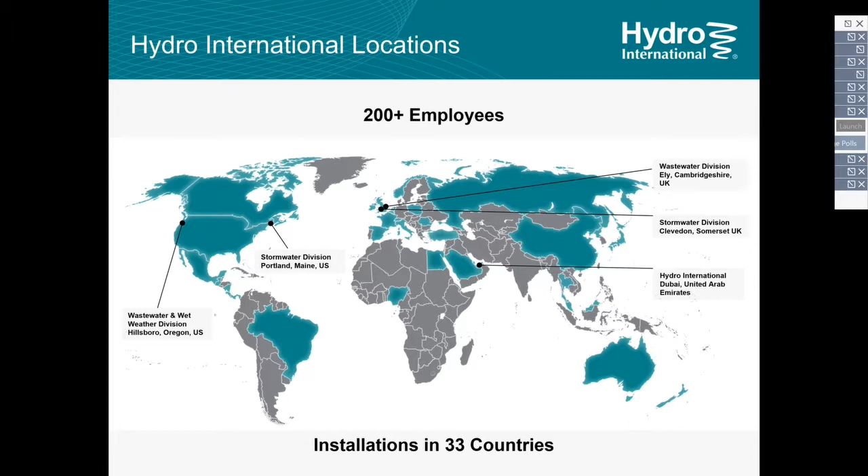Hydro's been around for over 40 years, and we have been in the water quality, water quantity space throughout this period. We pride ourselves in our origins coming from product development, research and development, so you would find that the products and services we provide are world-class, industry leading. Our separators and filters are all over the world, with lots of installations in the US, in Canada, but also in places like New Zealand and Europe.

One of the things we like to talk about is our best-in-class hydraulic laboratory housed here in our Portland facility, where with a 25,000-gallon tank, we're able to really hone in on our testing and ensure that the products we are supplying are really fit for purpose. We augment this with some computational fluid dynamics so that we can do rapid prototyping and engineer our products to be fit for purpose.

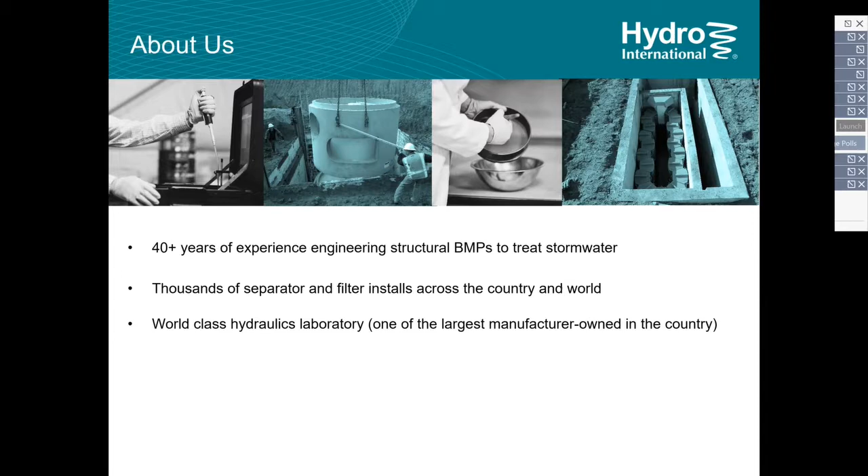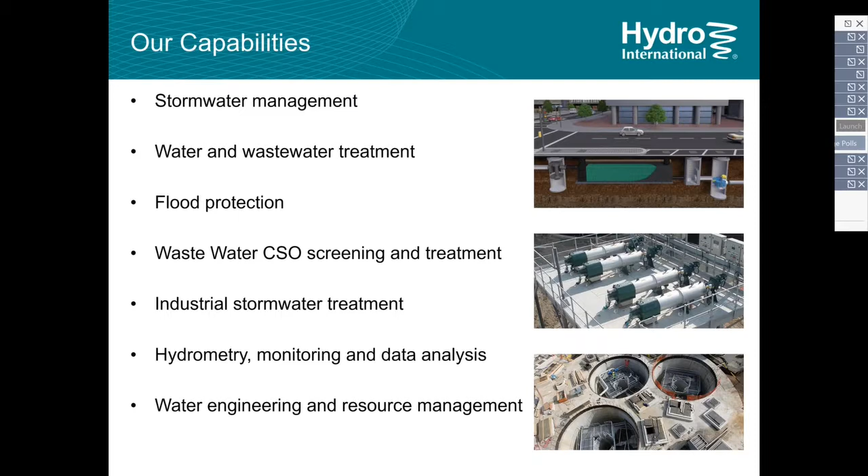Product development and R&D is at the heart of what we do, and one way we do that is by collaborating with research institutions, especially universities around the world. In the US, we've partnered with universities like the University of New Hampshire for verification work. We'll talk about the Up-Flo filter, which actually started development at the University of Alabama with Professor Bob Pitt, and we got involved. So we've used research institutions for product development.

At places like the University of Florida, over the last two years we've done monitoring that has helped with our regulatory approvals. We've also worked with universities in the United Kingdom and other parts of Europe, finding professors doing leading research and technological breakthroughs we can capitalize on, as well as getting product verification and certification to meet regulatory needs.

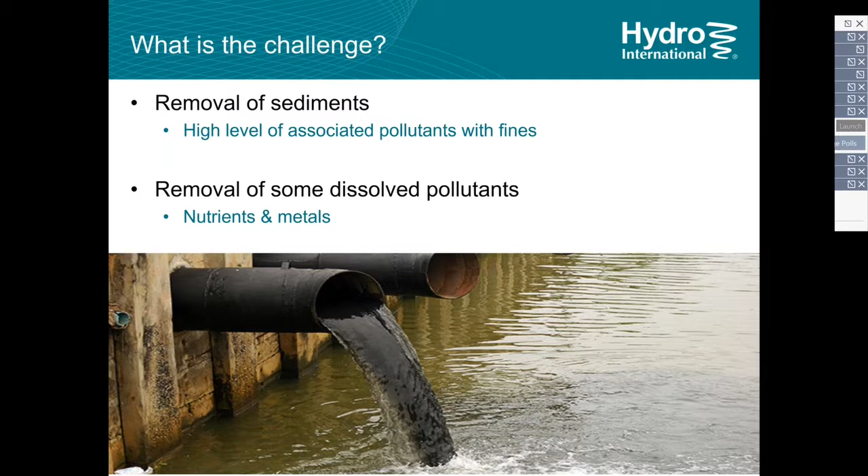That created an industry, because stormwater runoff carries a lot of sediment with high levels of associated pollutants that need to be removed, since their impact on our water courses is significantly negative. Over time, dissolved pollutants have also been added to the mix, some from agricultural runoff but also from stormwater management in our urban areas. So coming up with ways to take nutrients and metals out before they run into our water bodies is also quite critical.

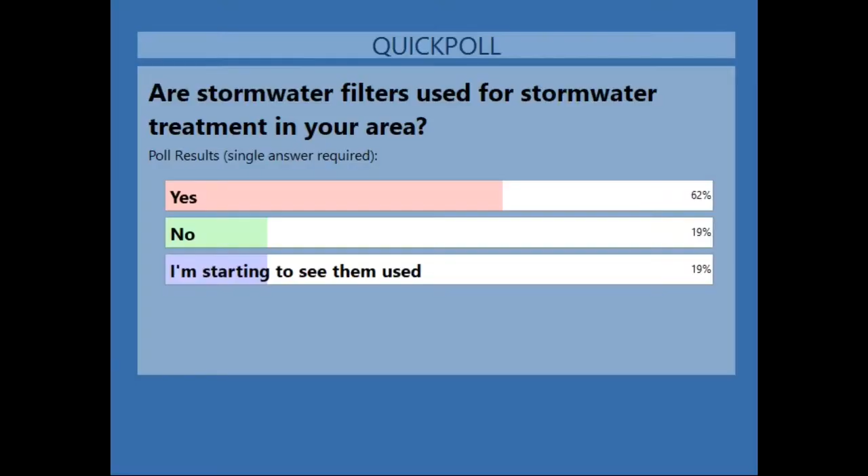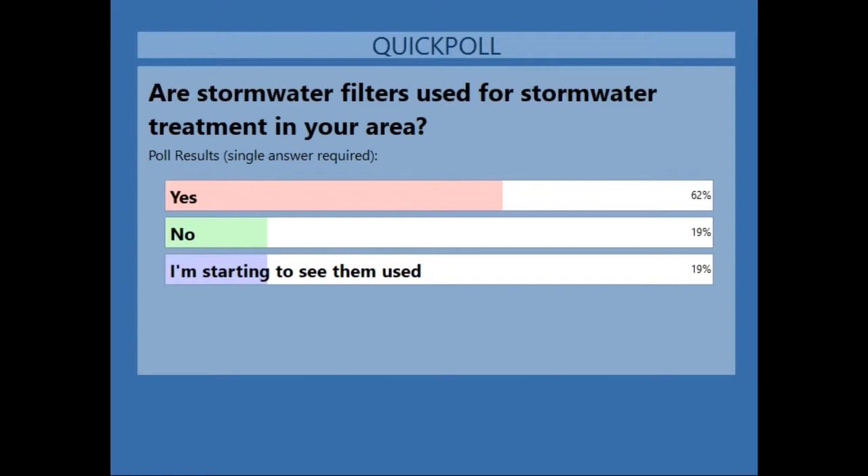I presume you're seeing the results from the poll now. On this webinar, about 60% of us are using filters as a practice for stormwater management, so hopefully as we go through, we'll get a few insights to help with that. There's also 20% starting to see them being used, so we might get some useful things here. Thanks for your participation.

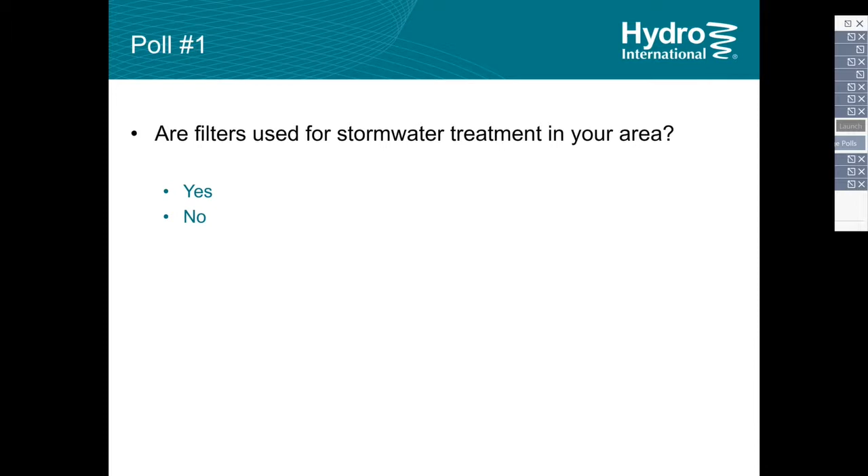So what are the things that we target in stormwater treatment? When we looked at the Maryland report, we found that sediment is a major contributor of the pollutants generated from stormwater runoff in general. And this has given us a sense of the particle size distribution of these pollutants, so we start from gross solids all the way through to dissolved solids.

Now, treatment goals determine what sort of system we need to get the level of treatment that we're looking for. So if you go to some places, gross solids is what they care about. So if you're looking to take out material that's more than 1,000 micron or so, a screen is probably appropriate to meet those regulatory requirements.

When you're looking at coarse solids and some fine solids, the higher end of fine solids, hydrodynamic separators, vortex separators are useful. And then when you get into really fine solids, then you have things like filtration and other chemical processes being useful mechanisms. So this gives a broad spectrum based on regulatory needs.

And in some jurisdictions, taking out 100 micron is adequate, so a separator would be useful, and there are a range of separators that address that. But today we want to focus on those finer particulates where filtration gives us some advantages over just regular settling.

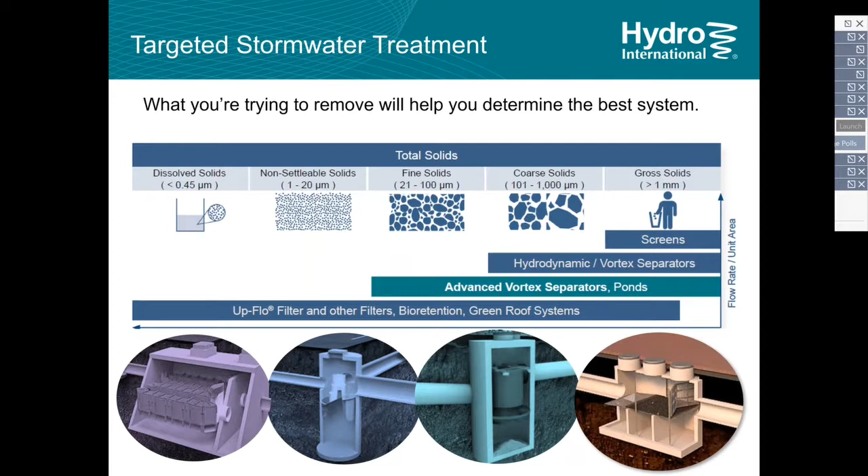To talk a little bit about the filtration process, there are really three key mechanisms by which we're able to take particulates, metals, or nutrients out using the filtration process. The most widely used is mechanical separation or physical separation, as some might call it.

And here we're looking at sedimentation, just regular settling, enabling us to take out those pollutants. But you also have straining, where as some of the pollutants start to bed in, they're able to take other pollutants or sediments that are coming in to settle with it.

And then you have adsorptive processes where pollutants attract other sediment that's coming in, and they fill the pore spaces that are coming in there. So this is really purely mechanical, and you're doing a lot of straining in here.

We also have chemical filtration, where you are exchanging different ions, more applicable when we are looking at metals removal, copper, lead, zinc, and the like. And you can take out the lead and the zinc by exchanging them out for what you have in your media. And typically you have a little bit of contact time associated with this type of filtration to enable the chemical processes to take place.

We also have biological processes at play, very common when we're talking about water treatment and wastewater treatment. We're seeing it come into play in stormwater management as well, where the plants are giving you some nutrient uptake. So rather than having them go into the water courses, the plants feed on them.

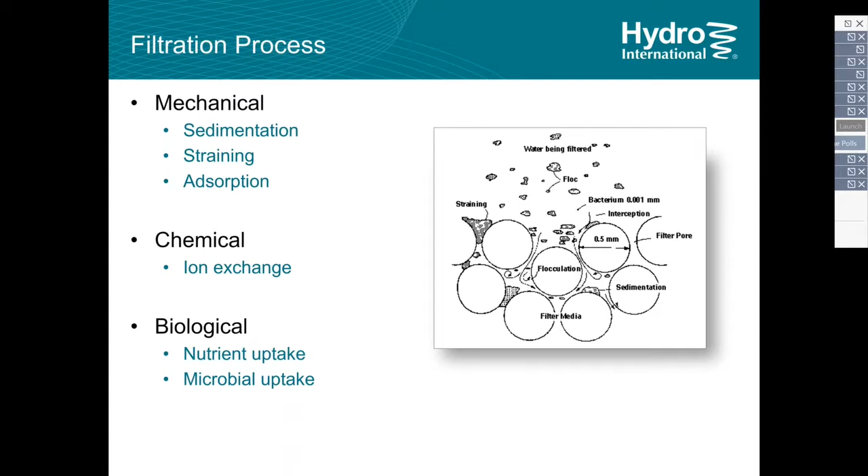But also you have microbial uptake, where the bacteria within the media matrix are eating up the nutrients and the metals such that they don't end up as pollutants. So we are recycling them into the food chain.

What are the constraints and considerations we want to think through when we are looking at filtration? A key component here is head loss. As the charts to our right demonstrate, as you put in more flow through, you're driving up your head. And that's something you have to consider in your drainage network. How much head do you have in there? And would it be able to drive the flow that's required to meet regulatory requirements?

And then surface area, very important when we talk about filtration. Really, that's how we even write out our equations. The more surface area we have, the higher the filtration rates, but also enables us to have more capacity to trap pollutants that are coming through.

And once we get into dissolved components and taking those out, where we're talking about nutrients and metals, contact time becomes one area of concern as well, because we want to ensure we have enough contact time within the filtration matrix so that the pollutant of concern can be taken out. So as we go through, I'll make reference to these three, to some of the filtration products or processes that exist that we can use.

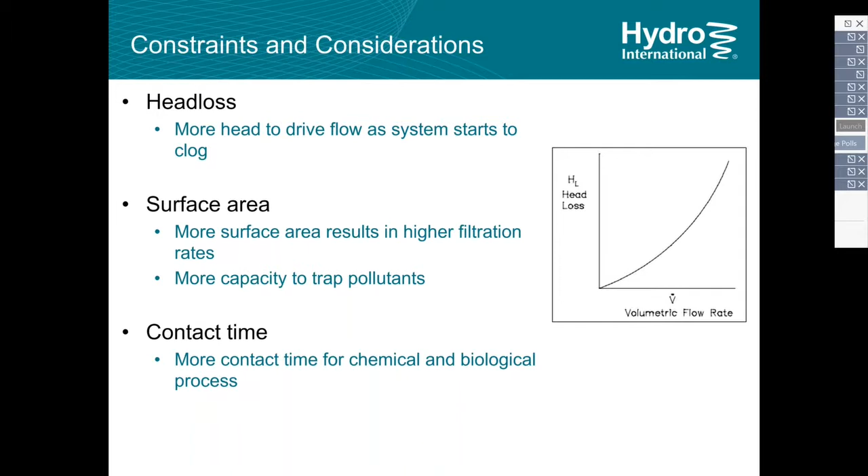So what are some of the filtration options that are available to us for stormwater management?

Here we're looking at media filtration, and it's by far the most widely used form of filtration. I'm sure quite a few of us would be aware of things like the Austin sand filtration. This would be in our general design manuals when we're looking at filtration. These have been around for a long time, and actually they are the low end of sand filtration in terms of flow rates when we're looking at downflow filtration.

So with this, you have your flow coming in. Your media is acting as a trap, a strainer for the pollutants that are coming in. You build your head over the media matrix. And as your media traps material, it becomes clogged. Every once in a while, the top 2 or 3 inches of the media needs to be scraped off and replaced, because that's where the bulk of the filtration is taking place.

So surface area is a big issue here, because you want more surface area so you can treat a larger piece of property, and you can only do so much in terms of flow rate, so it's fairly minimal. One of the downsides with this is that you're not using the entire bed of the media, but it's available to you.

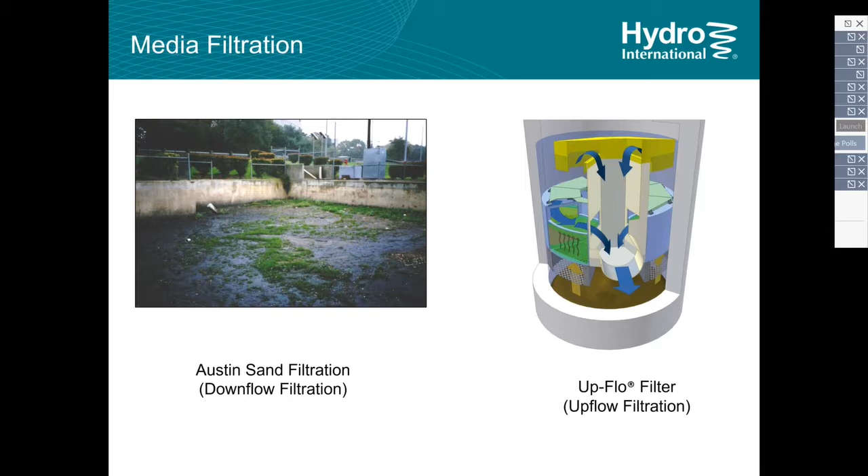As I've already mentioned, you have multi-stage treatment because you can get your coarser solids out before things get into the filtration matrix.

Some of the other advantages are a drain down that prevents the media from sitting in water between storm events. And because you are using the entire depth of the media bed, you have longer life and longer maintenance cycles.

And for systems like this, you can have simple maintenance because you can deal with the bags that are involved. From a head loss perspective, for these types of media filters, you're looking at a fixed head loss. So you start with a known head loss. As your media matrix begins to blind, you maintain the same head loss, but your filtration rates drop a little bit.

When it comes to contact time, not really an issue if you're dealing with sediment, but if you're dealing with nutrients or metals, then you're going to slow your filtration rates so that you're able to capture those pollutants. When it comes to surface area, because you are using the entire media matrix, you're able to consolidate some of your space such that you don't need very large systems.

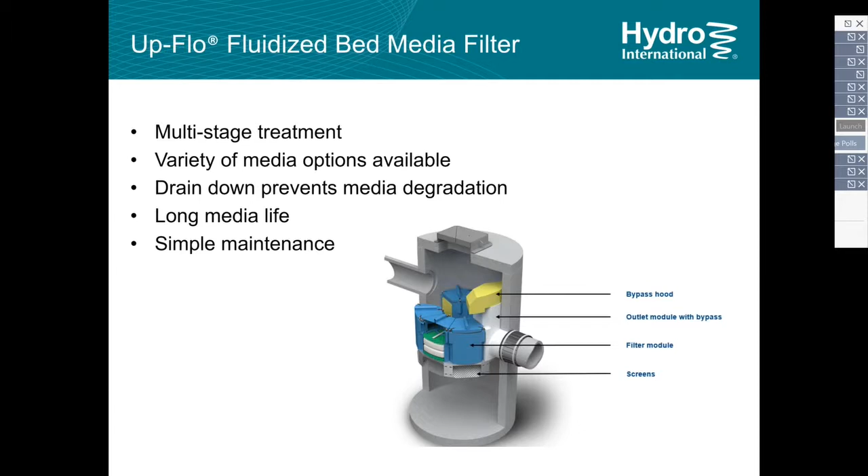Over the last few years, biofiltration has also become really important in terms of stormwater management. Just as with other media filters, there are non-proprietary options available like bioretention systems, which are very well suited when the land space is available or you're targeting specific pollutants and you have a specific media mix for that.

Some proprietary systems are also available using special mixes that have been engineered with an understanding of the loading rates or the filtration rates to support the pollutants that need to be taken out.

The thing with these systems is, effective as they are, because of the nature of the filtration, proprietary systems are usually loaded at rates that are lower than what you would see in the other media filters I mentioned. The primary reason is you're looking for some nutrient uptake, you're looking for some metals to be taken out, and so you lower your loading rates to be able to account for that.

And they're well suited for when you have the land available, but when you have site constraints, you do have some challenges associated with them. But they're an option that are available and provide very good treatment and control.

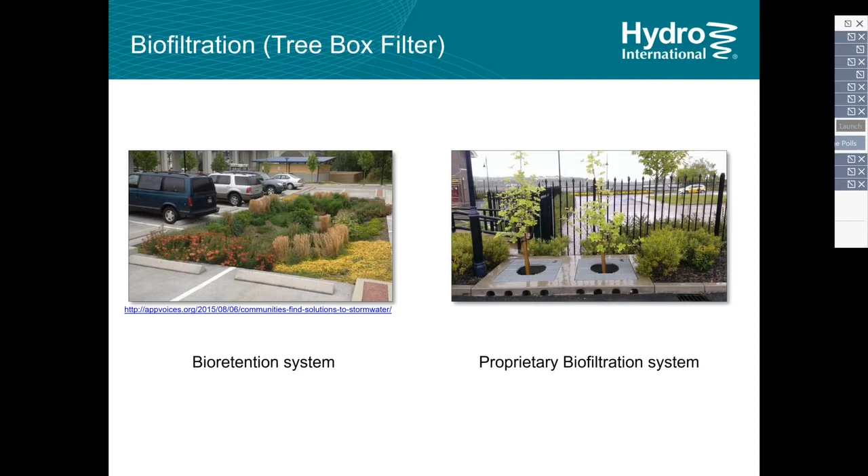All of these that have been discussed up till now use media. And one of the things we've spent quite a bit of time looking at in hydro is what media types give you the level of control that is required.

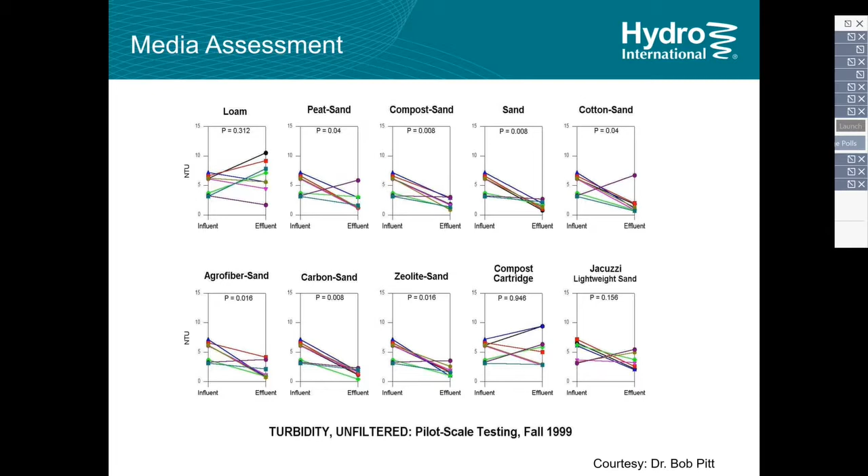Like I said, this happened to be sediment, but we've also used it quite a bit looking at industrial runoff as well. Typically what we're doing here is working with a client right from the onset, understanding the pollutants of interest. Once we're aware of that, if they're able to, we'd ask them to send a stormwater sample, and we'll put it through a column test, looking at different media types based on what they want to remove.

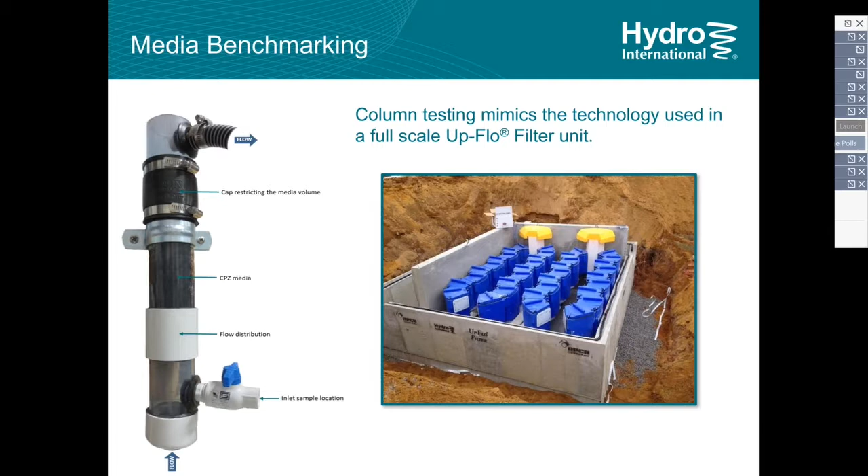A third aspect in terms of options for filtration is using membrane filters. Within stormwater management, this is relatively new—I'd say it's been used over the last 5 to 6 years. But we're all aware of cartridge filters that have been used in pools or aquariums to keep them clean.

The reason membrane filters are starting to be used in stormwater management is there are some areas where the level of treatment required is such that very fine particulates need to be taken out. When you get into very fine particulates, media filtration becomes a bit of a challenge, because if you use a media with very fine particles, you really restrict the flows you can put through.

With membrane filtration, what we're doing is selecting a membrane where we know anything that exceeds the micron size or the opening of the mesh will be trapped. As we've developed our filter range within Hydro, we've also looked at membrane filters, and within our range now we have membrane filters to support those areas where fine particulate removal is required.

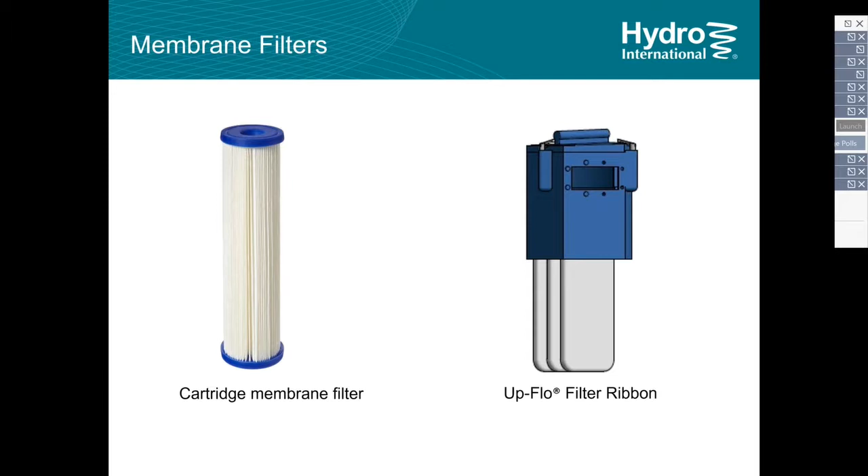Similar to the Up-Flo filter I shared earlier, with the system we have you also get that multi-stage process, where you're able to settle out your coarse particulates. So your membrane only has to deal with the very fine particulates that come through the system. Again, the membrane can be tailored to the needs that are there.

So if you're looking for 20 micron removal, you select a mesh that would provide that level of treatment at whatever percentage rates you're looking for. But when we talk about membrane filtration, one of the challenges is you really need high surface areas, because it's basically a straining process, and you're capturing everything that's coming through.

It's going to blind relatively quickly. So by having a high surface area, you're providing more opportunity to trap sediment before you have to go through a maintenance cycle. You get very reliable performance, because anything larger in size than your mesh size will be trapped. But like I said, surface area is a big issue here.

You don't have to worry much about head loss at the onset, but as your system begins to capture material and sediment gets trapped in there, your head loss is going to build up very quickly. Another thing about membrane filtration is that because it's really just a mechanical process, if you're looking at any dissolved control in terms of metals and nutrients, you're not going to be able to get that with membrane filtration.

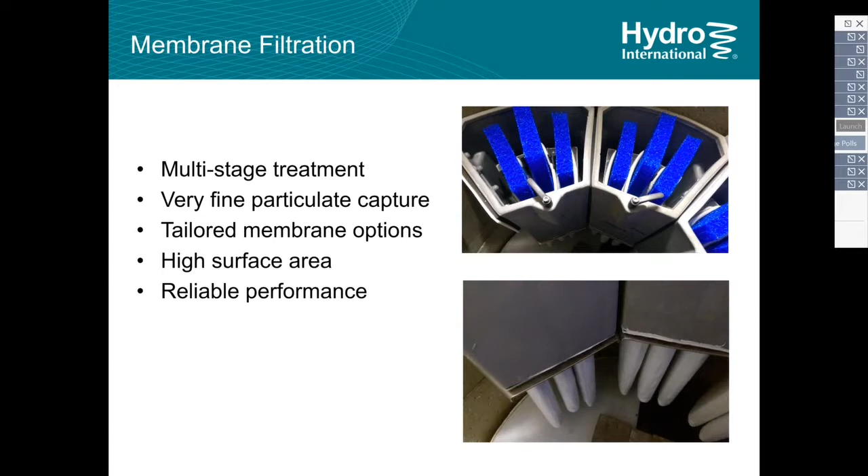So in a gist, we've talked about three types of filtration available within the stormwater industry, and depending on your needs, you can pick one of these to address those needs. Now that we know a little about these aspects of filtration, we'll take another poll and see what we see as key areas we need to address, or where we want to use our filters. I'm launching another poll and would appreciate your responses.

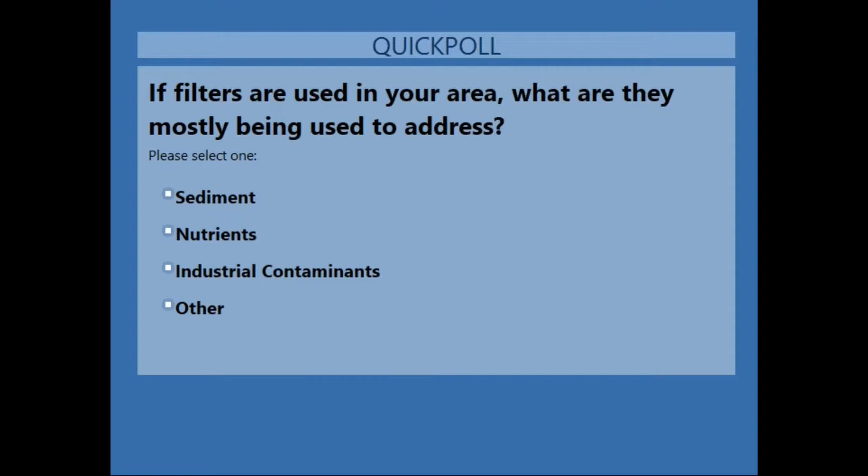From our responses, it looks like sediment is by far what we're looking to address. And with sediment, we can use any of the three filtration options available. The key there is understanding, are we dealing with really fine sediment, or are we dealing with relatively coarse material from a filtration standpoint? When we're talking relatively coarse for filtration, we're talking about material that's maybe 20 to 50 micron in size. So that would impact what we choose. If it's really fine, we probably have to go the membrane route. But there, what we need to understand is that we're probably going to have systems that are a little more largely sized to accommodate the load that comes through.

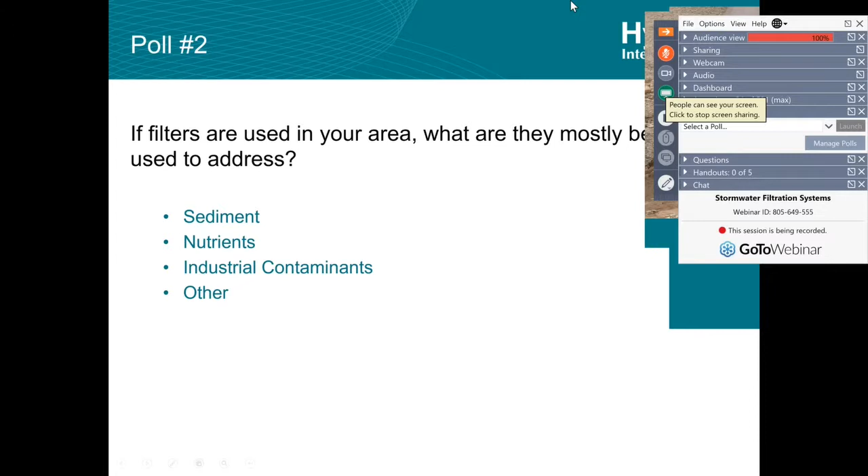And we have a little bit around nutrients and industrial contaminants. There again, you'll be looking at media filtration rather than membrane filtration. And we could use bioretention systems as well to address those needs.

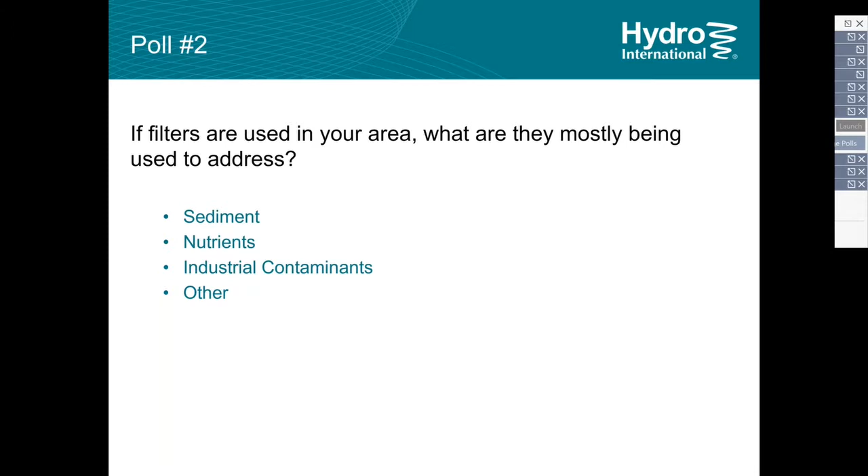So when we come up with all these products, how do we know that they work? Well, I mentioned at Hydro, we go through our processes, so we understand exactly how our systems work. We're continuing to do research, and we refine our products, put in different media. But on a broader scale, there are agencies in North America that require products to be certified, verified, and we engage in these all the time.

I think I shared one of the slides around that. But there are two in the US that stand out in terms of product testing and certification because they've become a bit of a national program, if we could call them that. One of which is the Washington Department of Ecology through their TAPE program. This is a field-based program where their interest is looking at sediment, nutrients, and metals. For sediment, they're looking for 80% capture of sediments that come through the influent for the particle size that exists there. For nutrients and metals, the ratings are for 50% removal. And it requires full year monitoring so that you can get the longevity to understand how a system works.

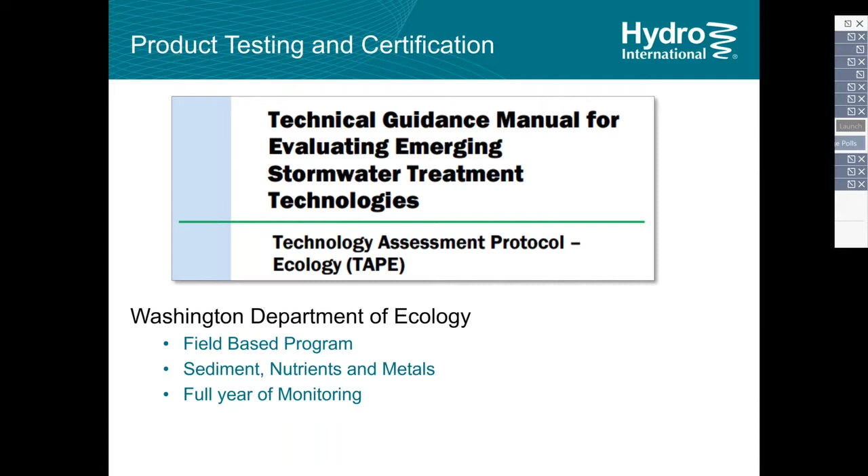One thing I would mention is that field testing is really challenging. So the benefit here is that you're able to understand the robustness of a system. But in terms of comparison between technologies, it's quite challenging because from site to site, the conditions will be different. And there are few agencies that look to what Washington does and use those results to regulate proprietary systems.

Also on the East Coast, there's the New Jersey Department of Environmental Protection Laboratory Protocol for stormwater control systems. This is a lab-based program. The advantage to this is that they have a very defined particle size distribution that every system gets tested by, so in that sense you can do apples to apples comparison. They're looking for 80% capture of the test gradation. And there's a second component to the test where there is an exhaustion test, understanding when you put a system through, how much sediment would it capture before a maintenance event is required.

So seeing that quite a few of us are looking at sediment removal, the New Jersey standard is a good one to look at from that perspective. And then the Washington standard adds to that from a longevity perspective under real world testing conditions. There's also a program up in Canada, an ISO certification for stormwater BMPs.

We're involved in that as well. And that's also a good way for people in Canada to understand which products will provide the level of service that's required. So having said all of this, obviously these are only 3 agencies doing this. All across the country, different states, counties, and cities also have their programs. And if there's no reciprocity with some of these I've mentioned, there are test requirements we have to go through, and we're able to do that with the resources we have, knowing how our systems would perform.

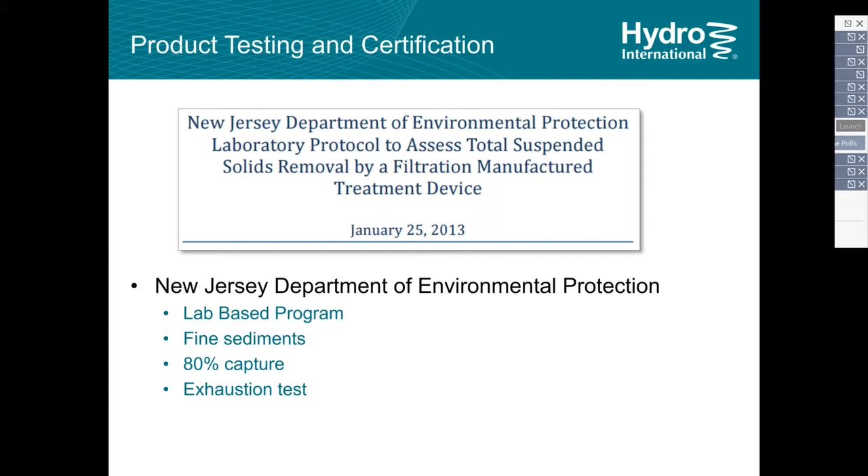So we've talked a lot about filtration. We've talked about the regulatory environment. One key thing we can't lose sight of is maintenance. Because filtration gives us the most challenging environment in terms of the pollutants we capture, maintenance becomes even more critical.

So the issue of maintenance is critical. And as an industry, that's an area where we haven't done a very good job. But moving forward, we need to put emphasis on that to ensure systems work as they should, and more importantly, that we are protecting the water courses for which the regulations were put in place.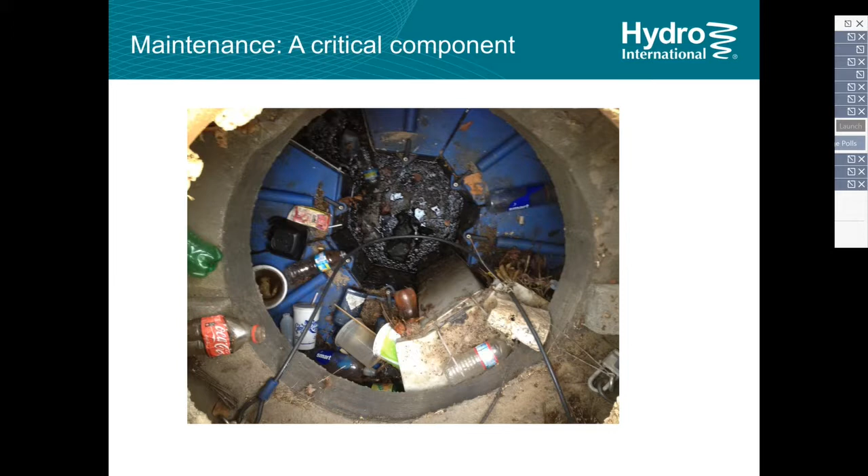I'm just going to run through a few pictures about how you'd do typical maintenance for one of these systems. This is a system that's reached maintenance—you can see how there's a lot of material on the lids of the modules. I'm pretty sure the media matrix has also captured quite a few pollutants, and then you have material in the sump as well.

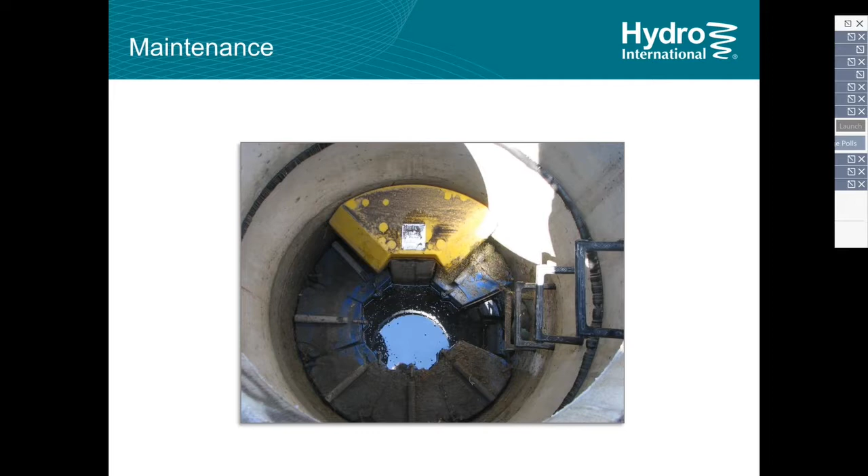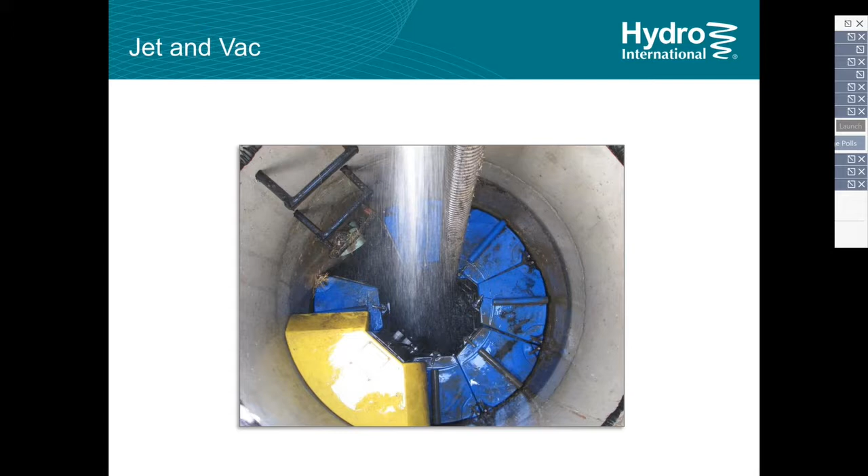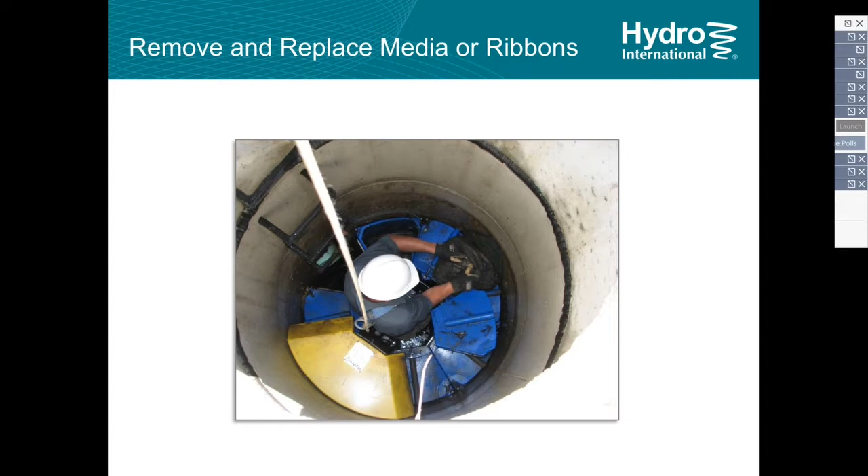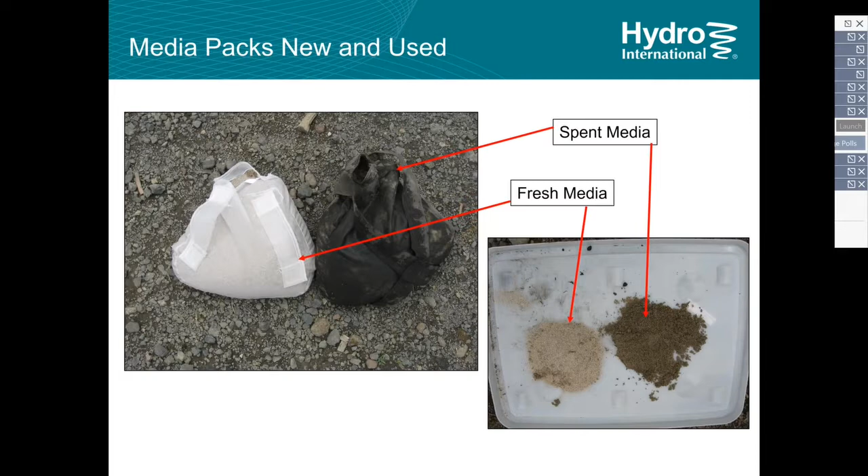So if you were to come to this system and maintenance was needed, you just use a hose to jet down the sediment trapped on the tops into the sump, then use a vactor truck to pull out the solids. You open up the lids, take out the bags where the pollutants have been trapped—these bags weigh no more than 50 pounds, most times less. So you have an individual with a harness in there who can take it out, and a couple of people up top who can take the bags and drop them down—no big equipment required. Then you change out the media bags, put in a new set, and wait for the next maintenance cycle. Depending on land use requirements, that could be 6 months, a year, or something in between. But that's something that needs to be monitored.

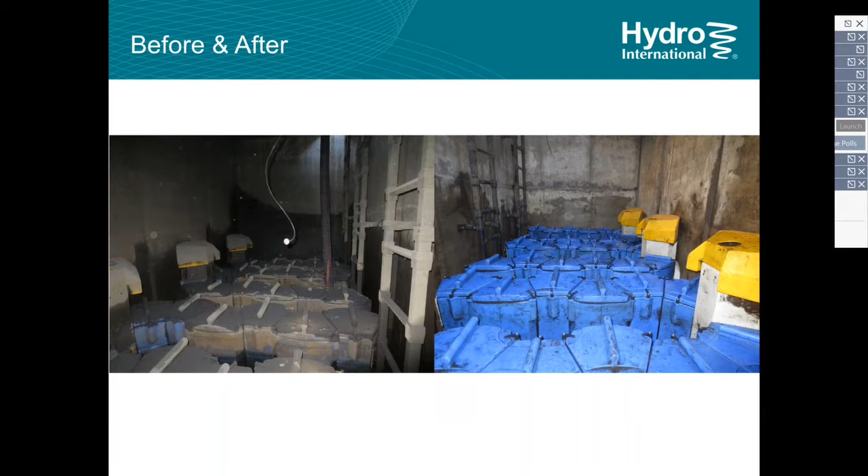I talked about sharing maybe a few opportunities, and at Hydro, as we continue to innovate and look at ways we can enhance the systems we provide and also manage water resources effectively, we're getting more and more into understanding how we can use telemetry to enhance the performance of our systems.

So if we look at this diagram as a schematic we can use—you could see number one being a filter system. In here, you'd have a data logger or a sensor, depending on what you're looking to do. That then takes data from system performance. This could be logged once a day, once a week—again, it depends on what we're looking to do.

That gets transmitted to your computer, where you have software that does processing, provides alarms, and gives information on sediment depth, filter health, things like that. So now you have actionable intelligence you can use to determine if it's time to make a change to the media pack or the ribbons.

Once these become fully implemented within stormwater management, we begin to get some value, because we go and maintain systems when they actually need it. Currently, we have scenarios where a system may not need maintenance, but because we're maintaining on a schedule rather than knowing when it's actually needed, we go earlier than necessary. There are other instances where a system has clogged up and is ready to be maintained, but because it's not time yet, we're not aware of it and haven't done the maintenance, so some of the captured material has been lost.

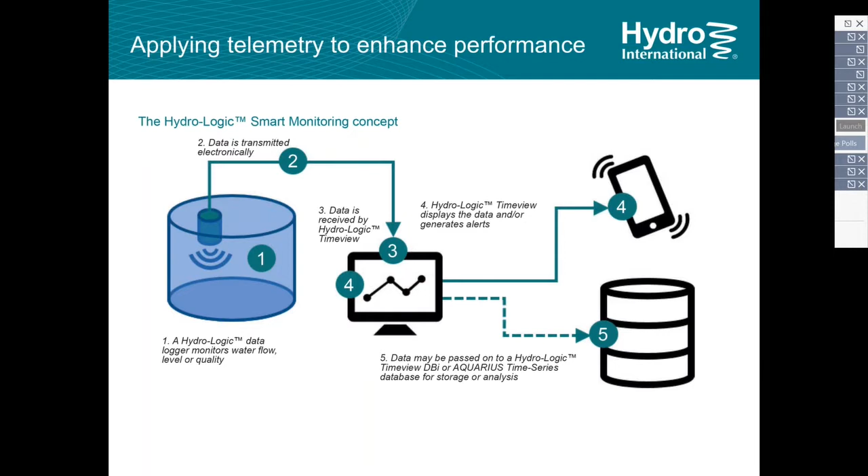Some of the work we've done around this involves looking at sensors within the media to understand what's being trapped. You can look at things like depth of media, weight of media, and the like to get an assessment. We're also putting data loggers into manholes, where you can look at depth of water to get a sense of head loss and its impact on system performance. These are ongoing, as well as media studies, to ensure we can provide the solutions our clients need.

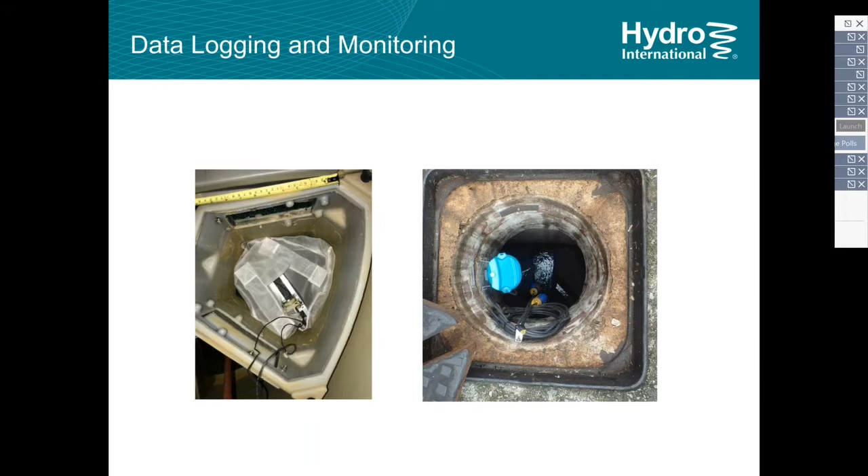Summarizing everything we've talked about today: regulations are increasingly targeting fine sediments. As we get into fine sediments, filtration is a key component, because some of our separator devices aren't able to take out fine sediments. But even with filtration, there are things we need to consider, like what particle size we're looking to take out.

If you're dealing with nutrients and metals, do we need some biological uptake? Do we need some ion exchange? How fine is the sediment? Those are the things that would influence what sort of filtration approach we take—are we going to use media, are we going to use membranes, and what filtration rate are we going to target?

Maintenance is a critical component to effective management, and we can't neglect that. Anything we can do to put effective maintenance practices in place is critical, and we see that as a need. That's a service we provide to our end users, if it's going to benefit them, or if they don't already have one in place.

Advances in telemetry are creating opportunities, and the barriers to entry are a lot less now. As we learn about this, it's something we're incorporating into our systems, understanding how we can harvest that data to better understand how our products are working and how we can improve them, but also to ensure our clients know exactly what they're getting in terms of system performance, and that maintenance is taking place at the right time, so that the regulations we put in place to manage stormwater are being enforced, and enforced the right way.